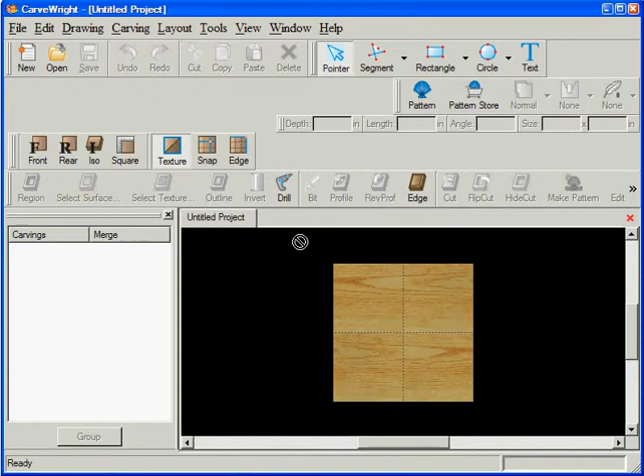Okay, I brought up my designer screen in CarveWright. Let's go get a board, and just for the heck of it here, I'm going to make it 11 by 11. That would not work for a cornice board, but it gives me a better shot at something I may want to do later as far as sizing and all. Got a carve area laid out.

Just make it a little smaller. Maybe as we go along we'll get rid of some of this stuff. I don't know if we can get rid of any of it now or not. I'm going to move this up here. It gives me a little more room. We'll just have to play with it as we go along.

Alright, I've got my board. So let's go to patterns. Let's see. Okay, I'm going to pick one rosette that was just made the other day by one of the CarveWright members. And let's put it on the board here. About that size.

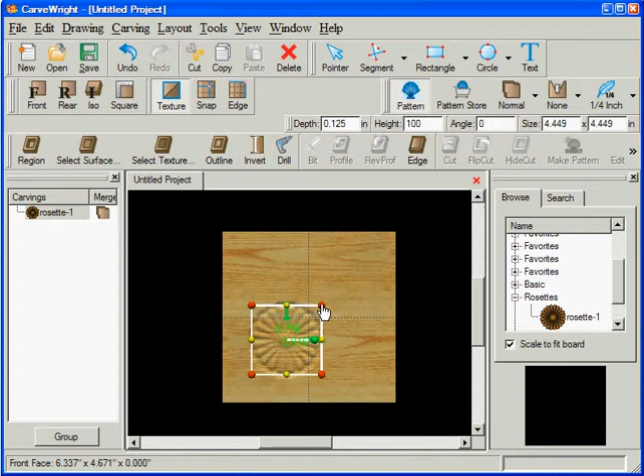And let's go layout, center, both ways. Okay, there's a rosette in the board.

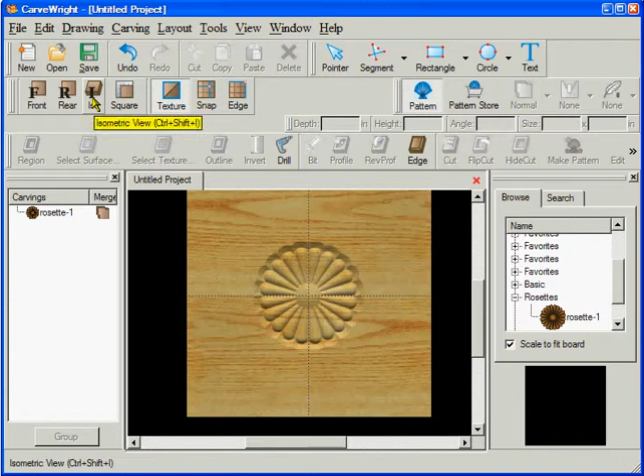And if I rotate my board, I can do an isometric. That's one of the icons I've got. You can put up whatever icons you want. You can see what that looks like. Maybe I want to rotate it more than that. I just want to see what's going on. But that's a carve pattern within a board. And that's what that's going to look like. Just that rosette.

Okay, now if I click on it here, or if I click on it here, I can see it, I'm activating it. What's an invert do? Well, there's the invert. Isometric. So it gives me recessed petals instead of the other way around. Okay, that's what the invert does.

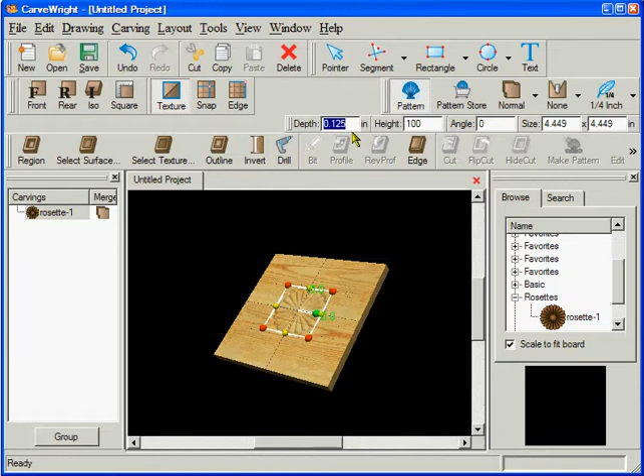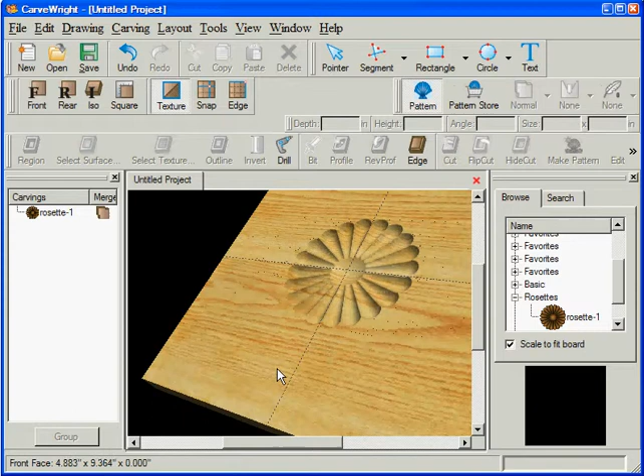Depth-wise, I'm at 1/8 of an inch. I can change that to 1/4 inch, see what that does to me. That gives it more pronounced. And again, if I invert that, then that's what that pattern will look like at the depth of 1/4 of an inch.

Height-wise, I can adjust that. Let's put it 900. It gives a little more depth to it, maybe. Take off the invert. There's my invert. That's just what I've done with the depths and the inverts.

Okay, so let's square this thing up. I don't need the pattern section anymore, so I'm trying to make this bigger so we can look at it. So I'll be right back.

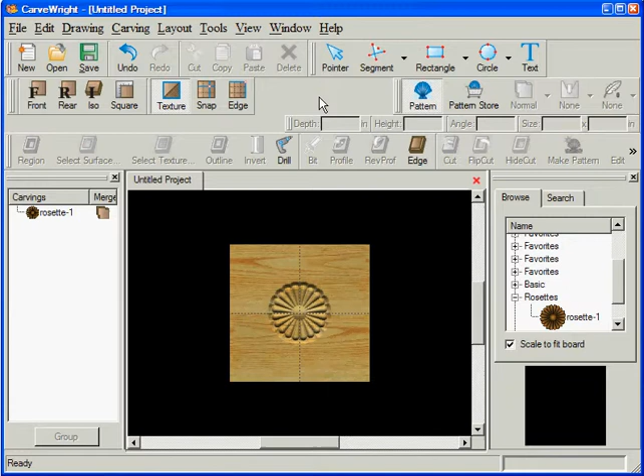Well, basically, let me show you, in case you don't know. I can hit pattern list. What's that do to me? I didn't take it off. There. That took that pattern list off.

Be right back. Okay, I want to get rid of this, and I found out that it's the carving toolbar. So there's that. So now, let me take this and move it up. It gives me a little more room.

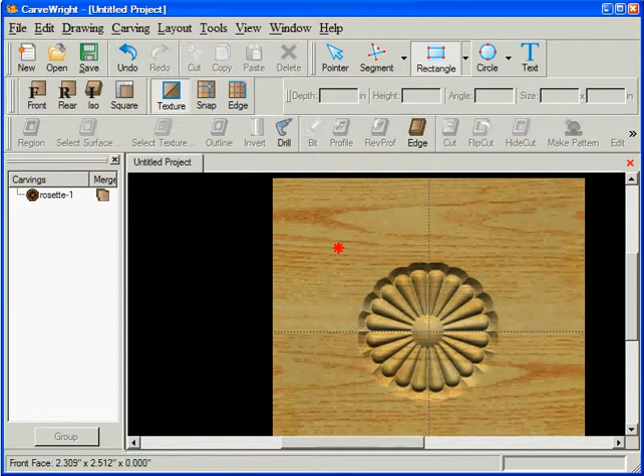Okay, so now if I put a rectangle around this box, I think first off I'll make it a little bigger so you can see it. Start here and come across like that. And maybe I want to select a surface on that box, or well, let's just do a carve region to start with.

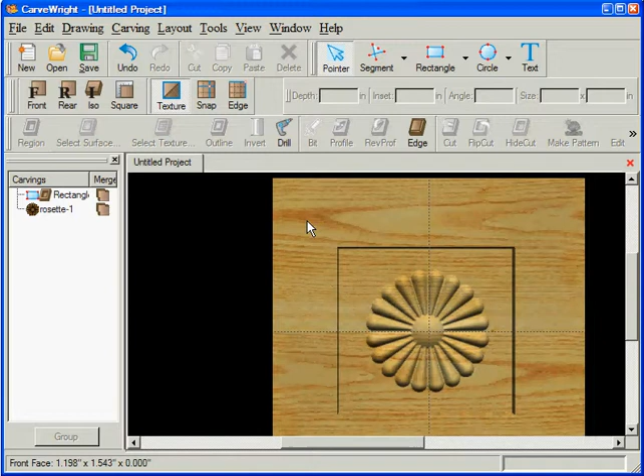Automatically goes to 1/4 of an inch. And of course here's your size. And that's what it looks like. Put it on isometric. Okay, that's a recess in that respect.

Now if I highlight that rectangle and select a surface, I get a whole raft of domes that I can work with. But I'm going to take this button punch, looks like that, or this button punch 2 that looks like that. I just have to choose one of them.

Now let's try this one to start with and see what it does. Well, I can see that it gives me this nice little taper here.

If I was working on a cornice or something like that and I wanted a square and then a circle in it, that would work. And I can play with this and do my pluses and minuses and normals on anything to see what change I can make in it.

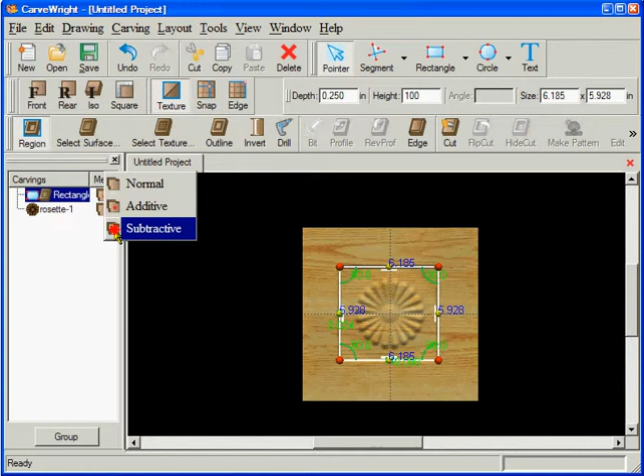Subtractive. But maybe there's a better way. Okay, maybe I don't want that square. Maybe I want this thing to kind of be subtle. So let's get rid of this rectangle and let's go get a circle.

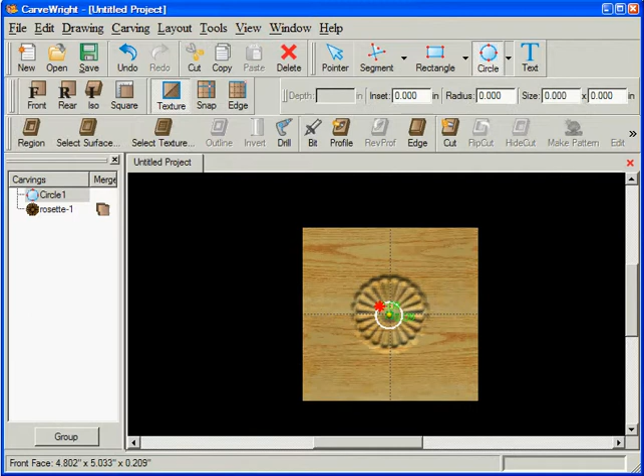It's just playtime, okay? Start here in the center, come out to about here, and let's lay out center both ways so that we have some perspective. Okay, there we are. Let's go to our carve region.

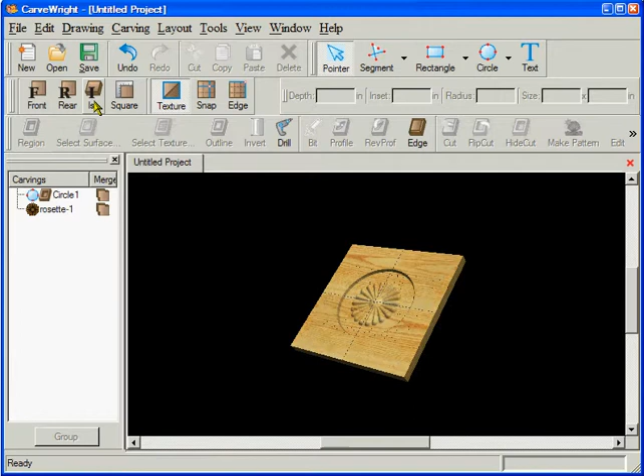And it's set to 1/4 inch, see what we got. Okay, perspective. Yeah, I don't like that line. I mean, maybe you do, but that's not what I'm looking for. I'm looking for subtle, and that's not subtle.

Okay, so let's select the circle again. I like to come over here, it's easier than trying to find it here. I can do a lot of things on this carving list. Let's get rid of the carve region. This is just one way to do it.

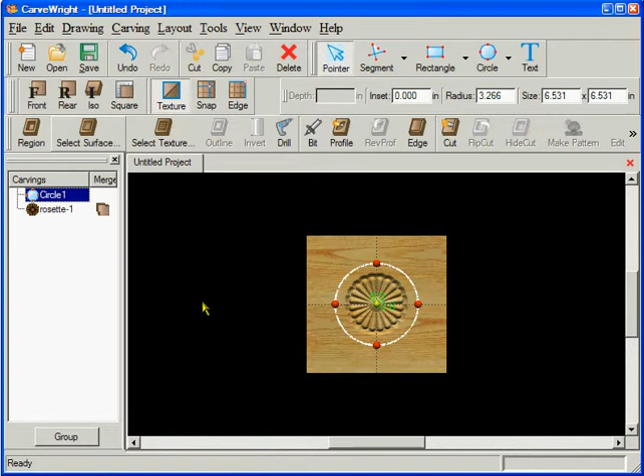Okay, now let's come back and select the surface without doing a carve region. It's the same difference, but maybe we can do something. Now I have this button punch 2, right? There we are. It does the same thing.

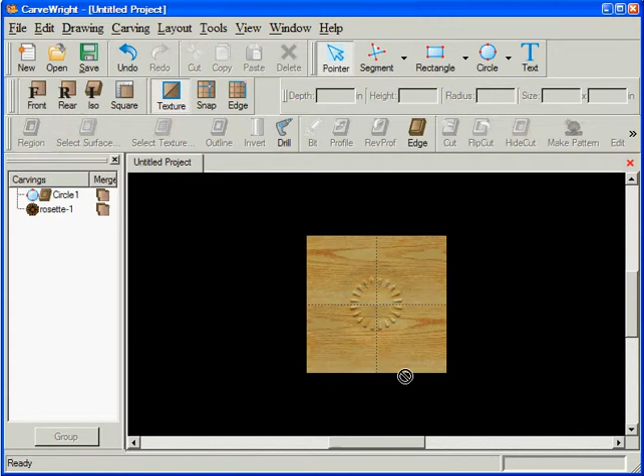Alright, now I've got to figure out what I want to do here. Okay, what happens if I invert it? It's still there. Okay, what if I set it to 0.1? Alright, now it's changed my rosette, but it gives me a more subtle deal that is just a depression in the wood.

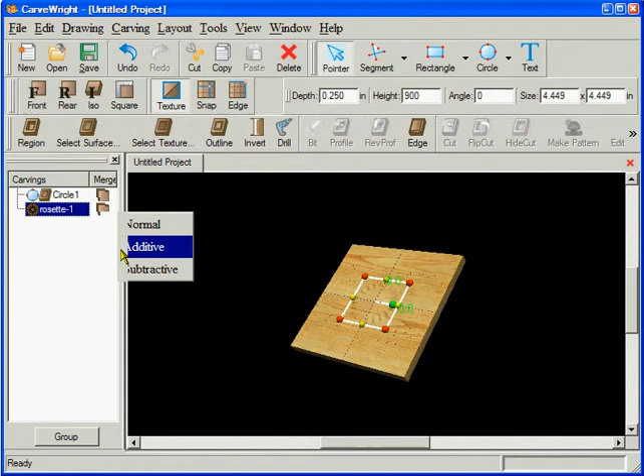Okay, so now let's pick the rosette and let's make it an additive. Now that doesn't look bad. Well, I got my line again.

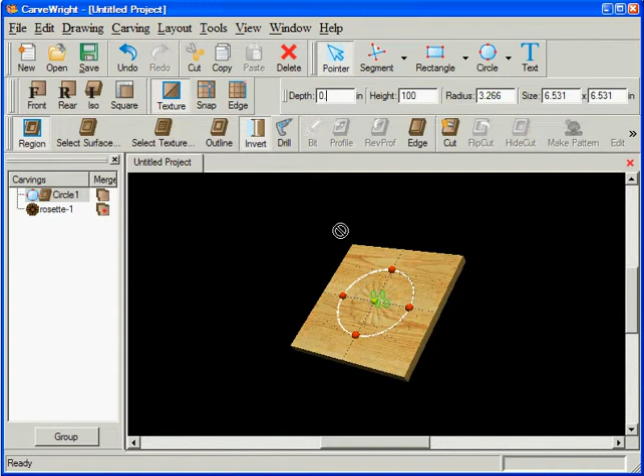0.1. Let's try 0.05. Let's just play. Alright, let's do a different way, okay? Surface. That's this button punch. What happens if I do this one? Still got it. Let's take the normal off of there.

And it's just playtime to see what we want to do here. Okay, select your surface. And I can hold down my left button and rotate this thing to see what it looks like. So that goes down on the edge. I think I want... oh, wait a minute now.

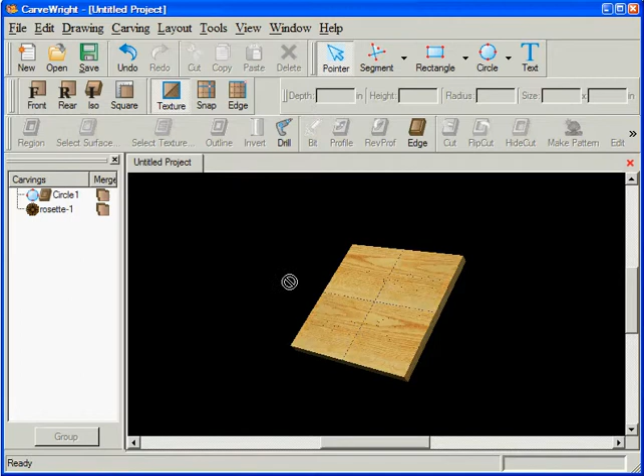Alright, let's try something here. We got it inverted there. Let's see what we got. Isometric. Can't see much. But we just play. So I'll be back in a minute.

Okay, I deleted the circle. Let's try it again here. Circle, here, go out. Layout, center both.

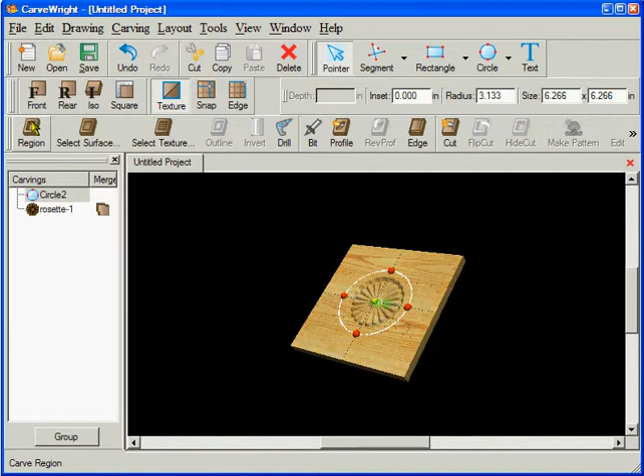Select your surface. Button punch 2. Okay, and we'll play. Okay, here's our circle and here is our rosette.

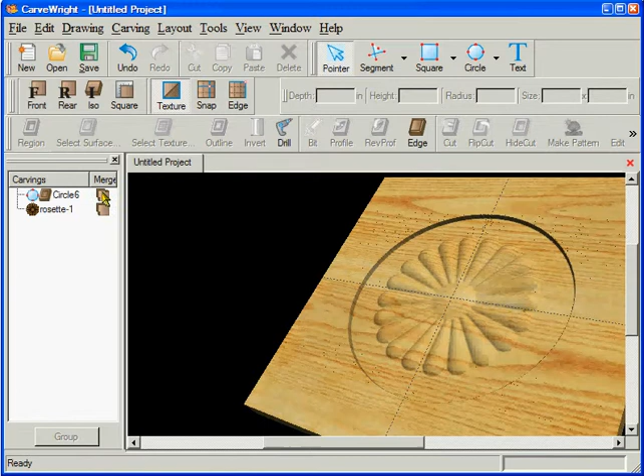I don't like this line, but I'll come out with something. They're both set at normal. If I set the circle to additive, I don't see much change. If I set it to a negative, then the rosette becomes embedded a little bit.

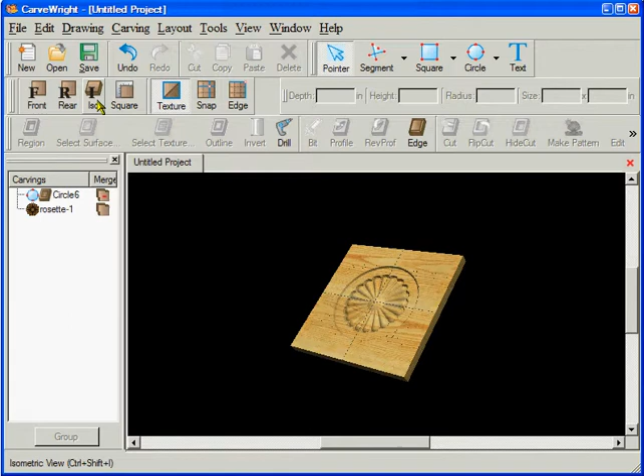So that's what we've got there. Okay, so if I set it back to normal, and let's go to the rosette and do a negative. Go to the rosette and do a negative. Oh, okay, what do we got there? That's different.

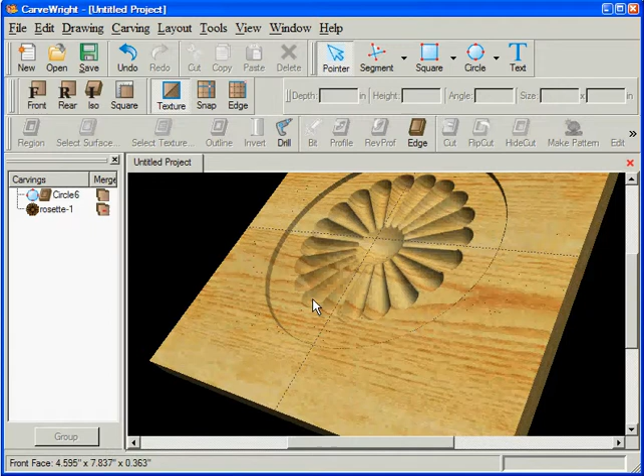Okay, so what if we made both of these things larger? I'm going to click on this, hold down Control, click on this. I've got them both. Let's come over here, stretch them both at the same time.

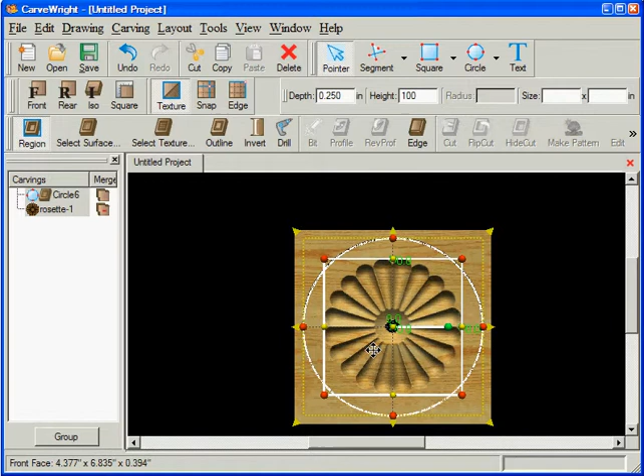Ooh, put a hole in the center. Okay, can't go much deeper with that. Let's just take this one and bring it out. Uh-oh, now we got holes all over. Let's go to the rear and see what it looks like.

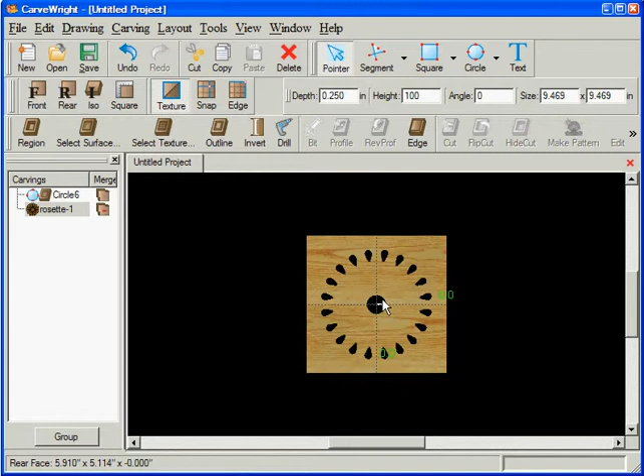Aha! I can make, you know, if I had the right number of rosettes, I could make a clock with holes in it, and there's a hole in the center. Maybe it's too big for what I want, but I can do that kind of stuff. So there's my perspective. It almost looks like a wheel on an automobile or a T-car, doesn't it? That wouldn't be bad.

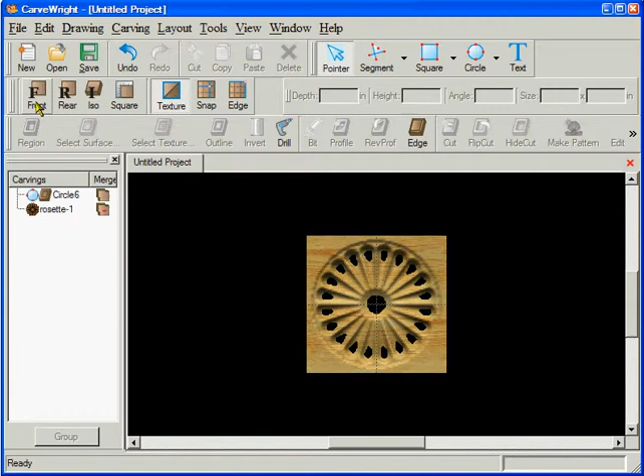So we do have that kind of option, don't we? What happened if we put another circle here and put it about like that, and select a carve region, and it went to 1/4 inch.

Let's make it 0.01. Ooh, how about that? And whoops, let's go get that circle and make it bigger and bigger. Doesn't do anything in that respect.

So go to edit, undo, edit, undo. There it is, the way I had it.

Have I got everything centered? Let's see. Click on that one, hold control, click there, click there. Layout, center, everything. Okay, everything's centered.

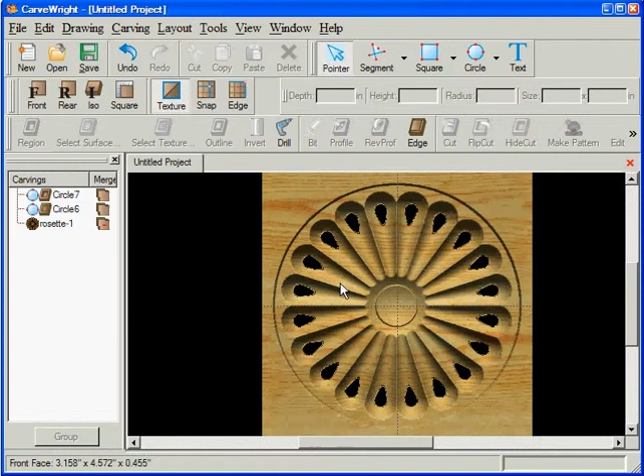Rosette, what's my depth? It's a 1/4 inch, let's make it 0.4. Okay, we can make them bigger. What if I made it 6/10 of an inch? 0.6. Okay, I can make them bigger.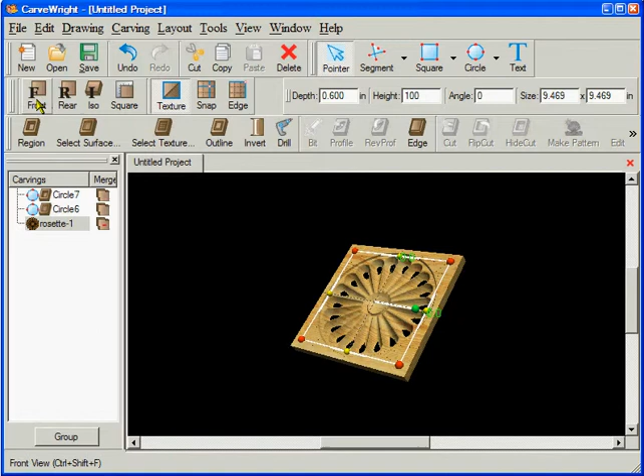I can do what I want. From that standpoint, it didn't change that much, but there is now no hole in the center, as you saw. Okay.

So, maybe I want to circle, maybe I want to drill a hole now. Okay, there it is, and maybe I want it a 1/2 inch in diameter, which means... let's see, what did I say? 1/2 inch rod. Okay, so I want a 1/4 on the radius. So 0.25. Oh, if you want to put the zero on it, doesn't make any difference, it's still the same thing.

Layout, center, both ways. Okay. That's for the circle. Well, yeah, I can do that and do a depth, but there's maybe an easier way.

Let's get rid of that circle, and let's go to drill, and let's do that. And it's a 1/4 inch hole, is what it's going to do there. Let's change this to 0.25. That makes it a 1/2 inch hole.

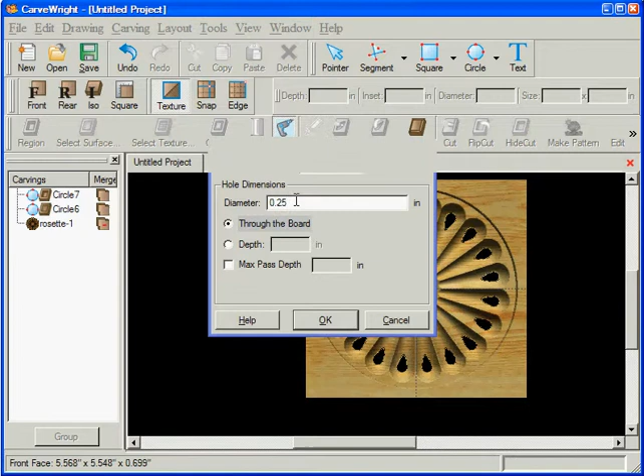Or I could go a specific depth. Okay, so I want a 0.25, and it's a 1/2 inch hole. Layout, I want it centered both ways. Okay, so there I have a 1/2 inch hole. It just gets a little confusing sometimes.

But now I've got the start of a wheel for a toy car or something like that. I can play.

Let's do another circle, and we'll come in here and do it about like this. And let's select the surface, and maybe try this one. Don't know if it's going to change anything.

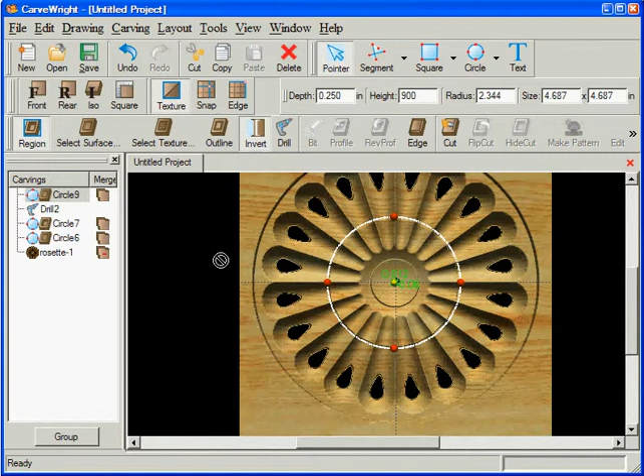Okay, it's 1/4 inch and the height here. Let's make that 900. So far I haven't seen any changes there. Maybe subtle. Yeah, a little bit subtle with that dome on there as well.

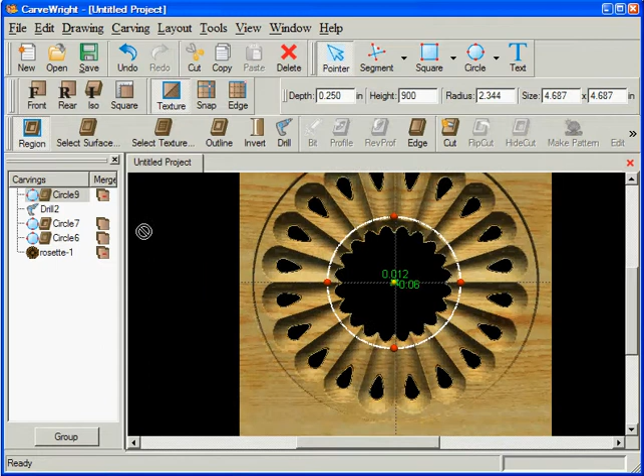So there it is, circle. Let's make it additive. There. Okay, that gives me a more pronounced dome. If I make it subtractive, ooh, don't want that. Additive looks good, and if I make it a little larger...

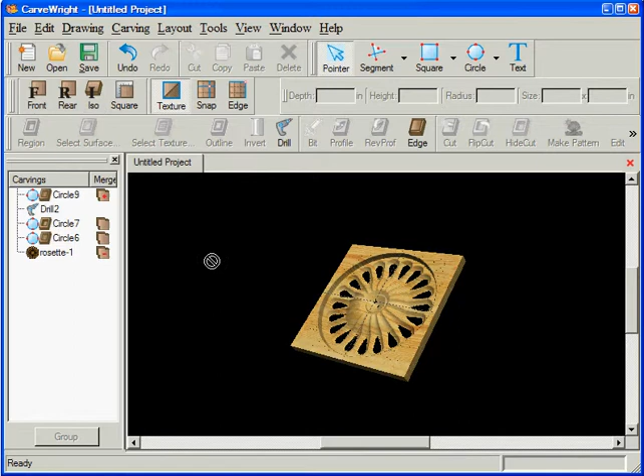I can do that. Okay. So isometric again so we can see what it looks like. It doesn't look bad. If I remember everything I've done on this, or write it down, I can do the same thing on the other side, and I can end up with a real wheel here.

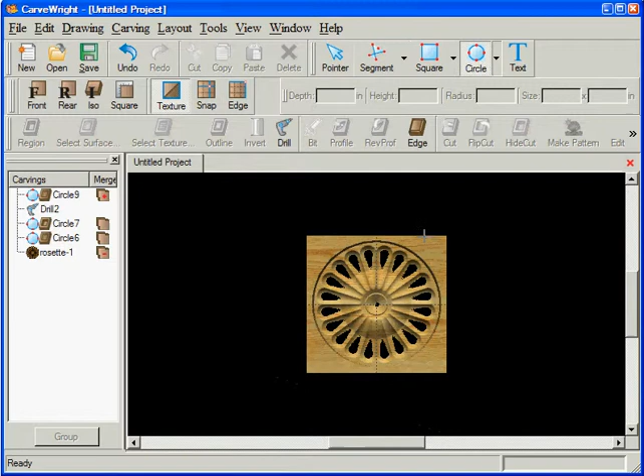Okay, let's try another circle, and we'll go out a little bit bigger than that, just a hair.

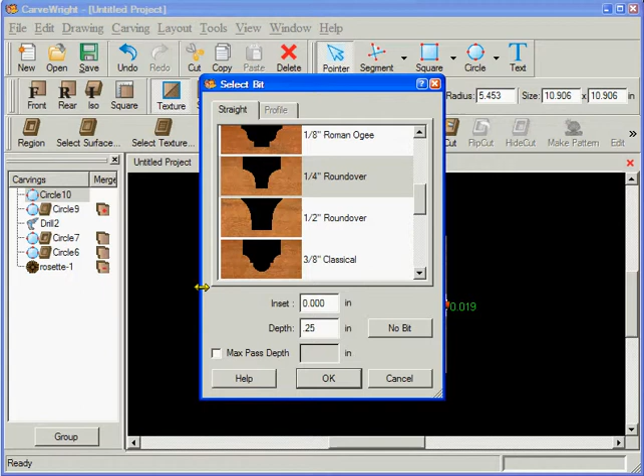Let's choose a bit, and let's come down here and get something like a 1/4 round, and change this to 1/4, and say OK. Click outside it, isometric.

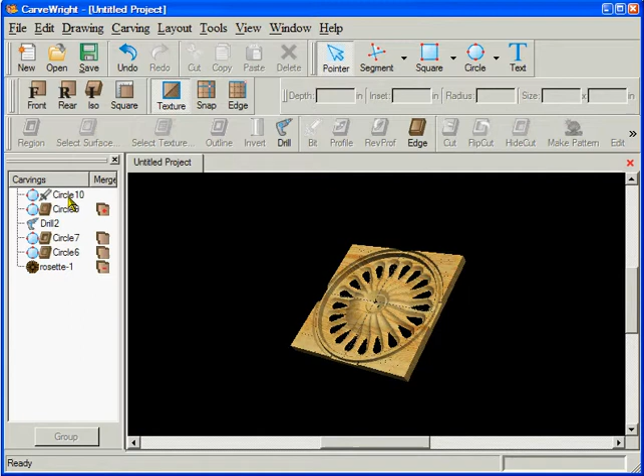Now I may be just a little bit too big for this board. So again, if I click on everything here, I can collapse it just a little bit to do what I want.

Okay, so now if I pick that last circle, maybe I want to use a cutout on that. I'm not going to worry about how many tabs, it's going to give me 3 minimum per foot.

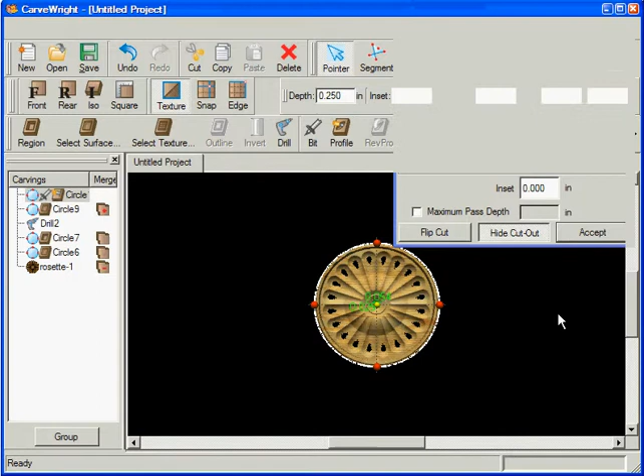I think I will flip the cut and hide the cutout, and accept. And there we have a wheel.

And it's just a matter of playing, doing what I want. And that, I think, is enough for this. But it's just, just play with something, get it the way you want. You can always go back and review and say, okay, what do I have here?

It's a 1/4 inch deep on the circle cut. This is a 1/4 inch and the height is 100. Okay, there is a carve region, and we know it was that dome. Got the drill, we got this circle here, that is 1/100th.

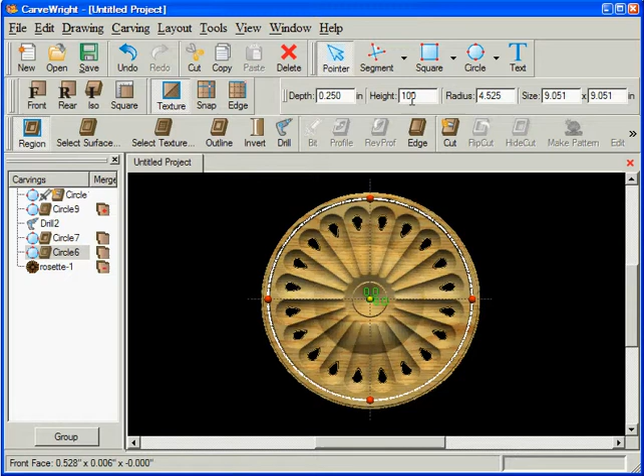And there's also a carve region on that. I mean, that's what the depth is there. This is a 1/4 inch depth, height is 100. And in my rosette, the depth is 6/10 of an inch, the height is 100.

So that's just a little bit of playing with one rosette and seeing what you can do. I was wordy, but I hope you enjoyed the lesson.